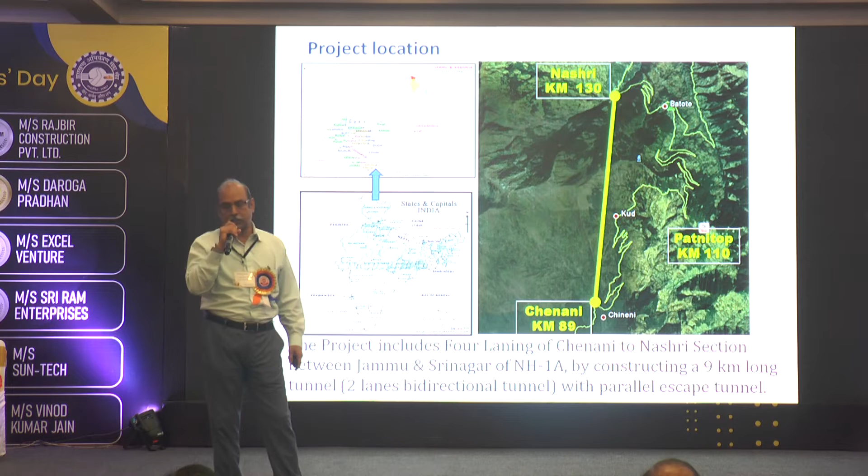It's not working here.

So, project was conceived in 2002. Actually, it was bid in 2009.

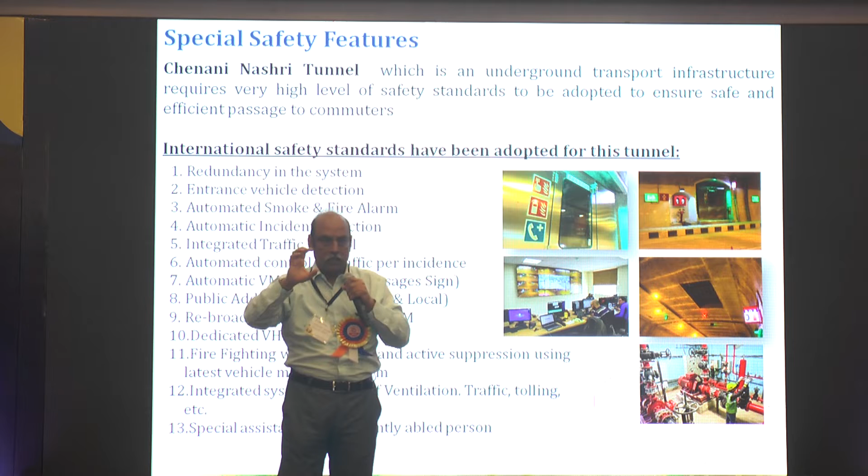लोअर शिवालिक में काम करना, हिमालय में 3 रीजन है - लोअर शिवालिक, पीर पंजाल एंड अबव हिल्स। लोअर शिवालिक मतलब बहुत कच्चे हिल, पीर पंजाल मींस थोड़ा पथरीला हिल, और ऊपर चले जाएंगे तो बहुत अलग चैलेंजेस हैं उसकी जियोलॉजी के। पीर पंजाल में लगभग सैंडस्टोन और बिट ऑफ मेटामॉर्फिक टाइप ऑफ रॉक अवेलेबल है। तो वहां क्लाइमेटिक रिस्क बढ़ जाती है, लेकिन जियोलॉजिकल रिस्क रिड्यूस हो जाती है।

ये टनल लोअर शिवालिक में थी, इसमें जियोलॉजिकल रिस्क बहुत ज्यादा थी। नंबर 2, इस टनल के अंदर ऊपर एक लेक है, सनासर लेक। जो पटनी टॉप जा चुके हैं वो देख चुके होंगे, ऊपर सनासर लेक है। सनासर लेक 6 लाख क्यूसेक की काफी बड़ी लेक है, और वो एग्जैक्टली 350 मीटर अबव इस टनल के है। इस टनल का कवर 1200 मीटर है, मतलब टनल क्राउन से जो हाईएस्ट ओवरबर्डन है वो 1200 मीटर है।

अब आते हैं टनल के टेक्निकल पार्ट पे। 2 टनल हैं, एक मेन टनल, इसके पैरेलल एक एस्केप टनल। इससे पहले हिमालय में इतने कम टाइम में 18 किलोमीटर टनलिंग प्लस एवरी 250 मीटर पे एक क्रॉस पैसेज। ये जो एस्केप टनल है वो मेन टनल से बनाई गई। एस्केप टनल केवल इमरजेंसी के लिए बनाई गई है, मेन टनल ट्रैफिक के लिए है। मेन टनल और एस्केप टनल को कनेक्ट किया गया है सेफ्टी के लिए, एवरी 250 मीटर में। जो मेन टनल है उस पे हर 500 मीटर पे एक लेबाई दी गई है कि अगर एक्सीडेंट हो, लेबाई ऑल्टरनेट है, एक इस तरफ एक उस तरफ। तो जो ऑल्टरनेटिवली लेबाई दी है वो पर्पज है एक्सीडेंटेड व्हीकल पार्क करने का।

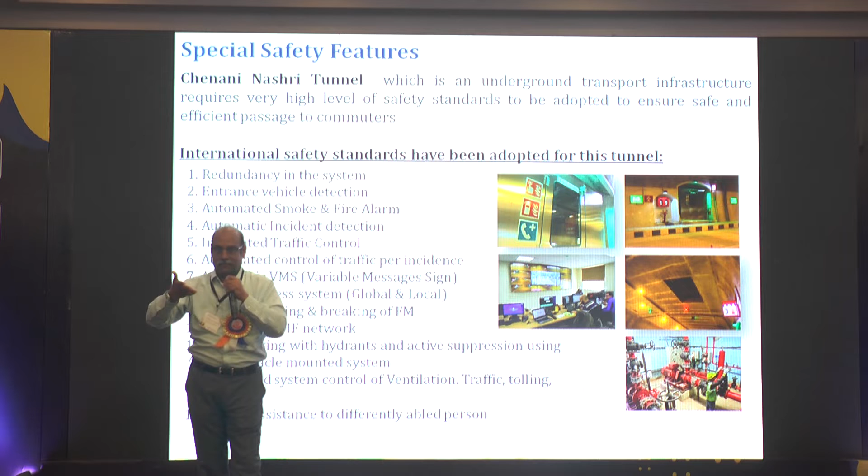इसमें क्या क्या सेफ्टी फीचर हैं जो इसे एक इंटरनेशनल टनल बनाती हैं। सबसे पहला रिडेंडेंसी। फॉर एग्जांपल मैं एक पावर की रिडेंडेंसी की बात करूं, 10 MVA का कनेक्शन है, मतलब इलेक्ट्रिकल इंजीनियर इन्वॉल्व हो रहा है। मैं सिविल इंजीनियर हूं, मैं जियोटेक्निकल की बात कर चुका हूं, जियोलॉजिकल की बात कर चुका हूं, अब मैं बात कर रहा हूं इलेक्ट्रिकल की। 10 MVA के कनेक्शन हैं दो।

दस MVA के दो कनेक्शन हैं, दो इंडिपेंडेंट - एक बटोट ग्रिड सब स्टेशन से और एक दूसरा उधमपुर सब स्टेशन से है। मतलब दो इंडिपेंडेंट पावर सोर्स हैं। इसके अलावा डीजी सेट लगा हुआ है 10 MVA का। इसके बाद में 65 UPSs लगे हुए हैं, वो इसके सिस्टम को टेक ओवर करते हैं।

उसके बाद में अंदर टनल के एवरी 250 मीटर पे यूपीएस लगा हुआ है जो 250 मीटर की लाइट की रिक्वायरमेंट को फुलफिल करता है। मेरा कहने का मतलब यह है इसका रिडेंडेंसी लेवल लगभग 3 है। मतलब कोई भी चीज अगर आप देखेंगे इसके अंदर तो वो 3 टाइम्स है। मतलब एक शटडाउन हुआ, दूसरा शटडाउन हुआ, थर्ड पे स्विच कर जाएगा। दैट इज द रिडेंडेंसी लेवल इन दिस टनल।

कोई भी व्हीकल है, दिस टनल इज डिजाइंड फॉर 30 मेगावाट फायर। 30 मेगावाट फायर के लिए डिजाइन है। मेगावाट फायर का मैं एक बता देता हूं - 30 मेगावाट फायर मतलब अगर एक बस अंदर टनल में जल जाए तो टनल को कुछ नहीं होगा, टनल के किसी सामान को कुछ नहीं होगा, लाइनिंग को कुछ नहीं होगा।

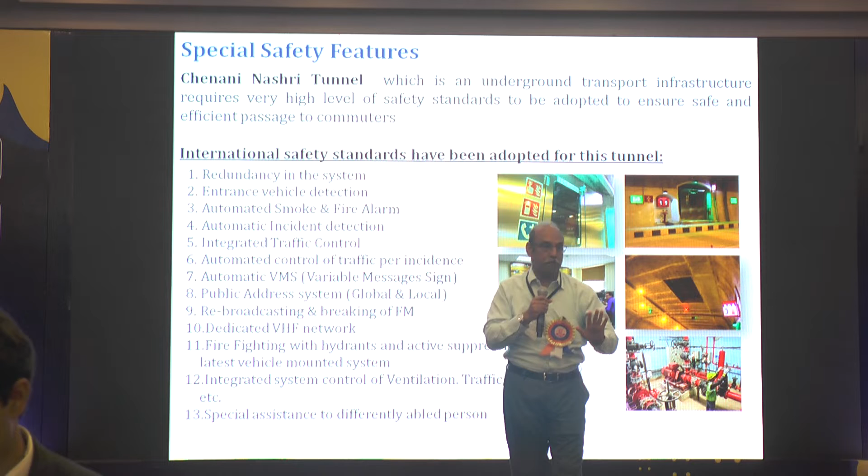ये एवरी इक्विपमेंट IP65 मिनिमम है, IP67 भी है, मींस 1000 डिग्री फॉर 60 मिनट और 250 डिग्री फॉर 2.5 आवर. दैट्स द कॉम्बिनेशन जो इसमें किया गया है सारे इक्विपमेंट का.

तो एंट्रेंस पे अगर आप डिटेक्ट नहीं करोगे, ये है आर्टिफिशियल इंटेलिजेंस, AI. AI मींस ऑल द traffic management system, all control systems is governed by one software, और वो सॉफ्टवेयर ऑटोमेटिकली चलता है. उसमें ऑलरेडी सिनेरियो क्रिएट किए हुए हैं, वी हैव क्रिएटेड ऑलमोस्ट 250 सिनेरियो. अगर ऐसा होगा तो ऐसा होगा. क्रॉस पैसेज नंबर 4 पे अगर कोई व्हीकल खराब होता है तो कैसे डील किया जाएगा, क्रॉस पैसेज नंबर 16 पे अगर कोई आग लगती है तो कैसे डील होगा, अगर हवा नॉर्थ से साउथ चल रही है तो क्या होगा, हवा साउथ से नॉर्थ चल रही है तो क्या होगा. ऑल दिस परम्यूटेशन कॉम्बिनेशन हैज बीन मेड इन द सॉफ्टवेयर.

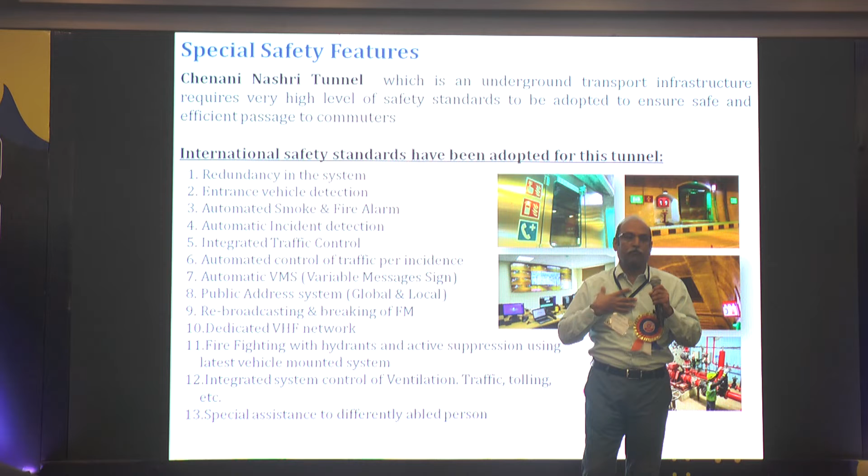वी वर वर्किंग इन J&K, very close to the international boundary, and it was that time terrorism was at peak. During our execution, Burhan Wani case happened, and we know how we controlled the labor. 2,000 आदमी every day टनल में काम करता था, 24/7 टनल का काम चलता था. 1,000 से 1,200 आदमी पहली शिफ्ट में और 800 से 1,000 आदमी सेकंड शिफ्ट में काम करता था, 12 आवर्स की शिफ्ट होती थी.

हर जगह हर तरह का काम चल रहा था. कहीं लाइनिंग चल रही थी, कहीं एक्सकेवेशन चल रहा था, कहीं ब्लास्टिंग चल रही थी, कहीं सपोर्ट सिस्टम लग रहा था, आई मीन एवरीथिंग वाज गोइंग ऑन. एंड ऑल इंजीनियरिंग फेजेस, वेंटिलेशन था, मैकेनिकल इंजीनियर का रोल था, इलेक्ट्रिकल, इतनी लाइन देनी पड़ती थी अंदर. 11 kV की लाइन थ्रू एंड थ्रू 4 बार चल रही थी. इस टनल के अंदर 350 किलोमीटर, 9 किलोमीटर की टनल में इलेक्ट्रिक लाइन डाली हुई है.

तो इमेजिन, फिर इसमें एक इंटीग्रेटेड ट्रैफिक कंट्रोल सिस्टम डाला है, मींस एंट्रेंस किस व्हीकल को करना है. अगर वो एंट्रेंस क्राइटेरिया को फुलफिल नहीं करता, पहला बूम बैरियर डाउन होगा. अगर वो पहले बूम बैरियर को क्रॉस कर गया तो सेकंड बैरियर डाउन होगा और उस व्हीकल को अंदर नहीं जाने देगा. बाय दैट टाइम आवर टीम विल बी एक्टेड, क्योंकि मैसेज चले जाएंगे सबको ऑटोमेटिकली SMS और कॉल ऑटो सॉफ्टवेयर से, और वो इमीडिएटली उस व्हीकल को वहां स्टॉप कर देंगे. That's the kind of traffic control system that has been placed.

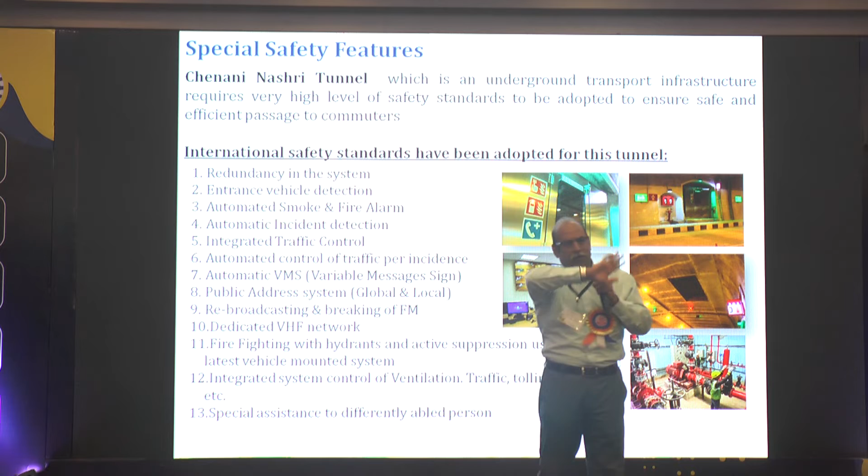All variable sign message, lane control system, lane messages सब immediately activate हो जाएंगे और वो सारे connected होंगे सॉफ्टवेयर से. और वहां सॉफ्टवेयर कंट्रोल सेंटर में केवल 3 आदमी बैठते हैं, एक PA सिस्टम पे वर्क करता है. वील टॉक अबाउट दैट, ऑटोमेटेड कंट्रोल ट्रैफिक पर इंसिडेंट पर, फिर उसके बाद अगर कोई इमरजेंसी हुई टनल में और टनल को रोकना है ट्रैफिक को।

तो जो पहले एंट्रेंस है विच इज अबाउट 600 मीटर बिफोर, वहां पहला बूम डाउन होगा. देन टोल प्लाजा है अबाउट 250 मीटर, वहां सारे बूम डाउन हो जाएंगे. देन टनल एंट्रेंस पे बूम है, वो भी डाउन हो जाएंगे.

किस साइड के डाउन होंगे? जो एंट्री साइड है, एग्जिट साइड कंटिन्यू रहेगा ट्रैफिक, जिससे अंदर जितना भी है वो चला जाए. अब जो इमरजेंसी हुई है उसके हिसाब से वेरिएबल साइन मैसेज लगे हुए हैं. लगभग 350 वेरिएबल साइन मैसेज है टोटल. जो जो इमरजेंसी है, जिस जिस तरह की इमरजेंसी है उस हिसाब से बता देंगे.

फॉर एग्जांपल अगर ये इमरजेंसी है कि टनल के अंदर जो ट्रैफिक है उनको व्हीकल अंदर छोड़ना है और इमीडिएटली क्रॉस पैसेज की तरफ भागना है, तो वो उस हिसाब से मैसेज बता देंगे.

ठीक इसी तरह इसके अंदर पब्लिक एड्रेसिंग सिस्टम को कैसे सिंक्रोनाइज किया हुआ है, ये देखिए. पहले पब्लिक एड्रेसिंग सिस्टम से बोलते हैं कि आप अपना व्हीकल छोड़ दीजिए और बाहर चले जाइए, लेकिन माइक बोल रहा है और मैं जा रहा हूं BMW में या मर्सिडीज में, मेरे कांच एकदम बंद हैं, AC चल रहा है, मुझे तो सुनाई ही नहीं देगा बाहर क्या हो रहा है. तो क्या करूं, कैसे उनको कम्युनिकेट करूं जो अंदर बैठे हैं कि भाई रुक जाओ?

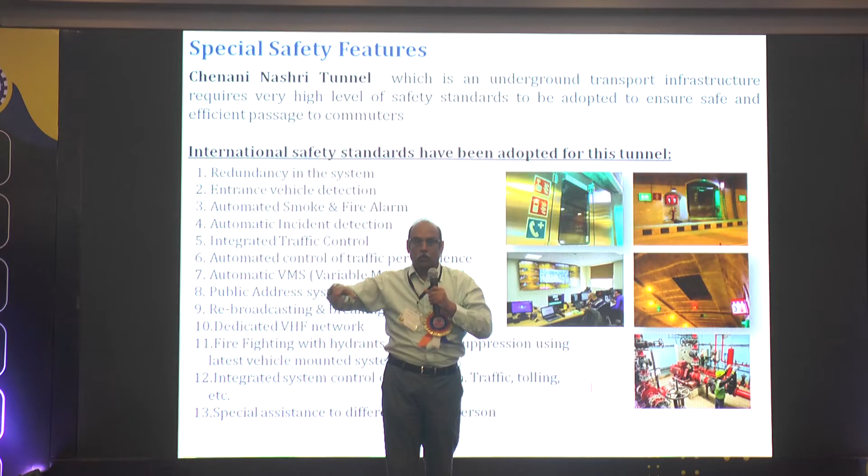जब वो एफएम चला के अंदर घुसते हैं तो आप एफएम को ब्रेक करो और बोलो भाई तू अपनी गाड़ी से रुक जा, यहीं उतर जा और भाग क्रॉस पैसेज की तरफ. तेरे पास नियरेस्ट क्रॉस पैसेज जो भी है उसमें चला जा अंदर.

क्रॉस पैसेज प्रेशराइज्ड है. प्रेशराइज्ड मतलब उनमें से हवा, दरवाजा खोलोगे तो बाहर आएगी, अंदर नहीं जा सकती. प्रेशराइजेशन करते हैं ना, जैसे आपने मॉल में देखा होगा, एक फैन लगा होता है, जैसे ही मॉल का दरवाजा खुलता है और आप एंट्री करने वाले होते हो, आपकी तरफ हवा आती है. ऐसे ही प्रेशराइजेशन किया हुआ है एस्केप टनल को और क्रॉस पैसेज को. तो अंदर धुआं नहीं जा सकता, अंदर आग नहीं जा सकती, बाहर हवा आने की वजह से. ये नेक्स्ट लेवल ऑफ सेफ्टी है.

अब अगर एफएम भी उसने बंद कर दिया तब क्या करोगे? पहला लेवल, जो स्पीकर लगे हुए हैं एवरी 25 मीटर पे, उन पे अनाउंस कर दिया. दूसरा लेवल, उसको वेरिएबल साइन मैसेज दे दिया. तीसरा लेवल, आपने एफएम दे दिया.

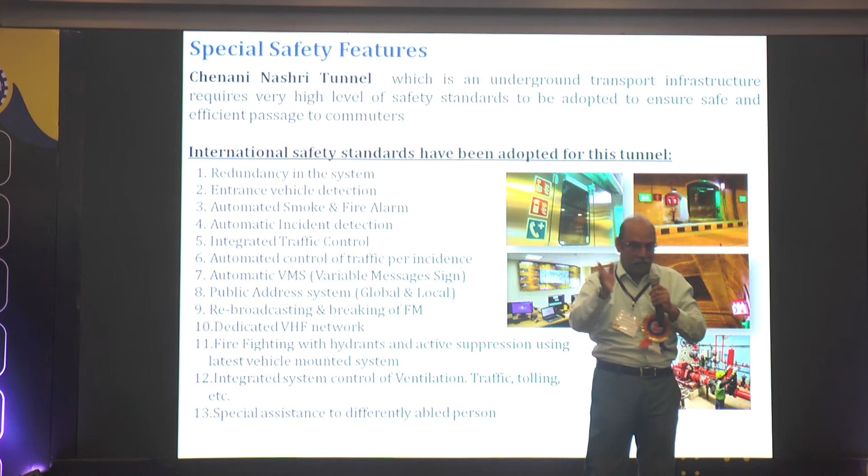अब चौथा लेवल, हम जितने मोबाइल अंदर टनल में जा रहे हैं, उन सब मोबाइल को हम रूट कर रहे हैं हमारे कंट्रोल सेंटर से. मतलब अगर मैं बटन दबाऊं तो सारे मोबाइल में बेल बजेगी और रिकॉर्डेड मैसेज आ जाएगा, अरे भाई निकल यार, तेरा गाड़ी रोक, इधर इमरजेंसी हुएला है, बाहर निकल.

दिस लेवल ऑफ इंटेलिजेंस वी हैव इनपुट और इट इज ऑटोमेटिक, आई एम नॉट डूइंग एनीथिंग. बाय द वे, गवर्नमेंट ऑफ इंडिया में किसी ने कंप्लेन किया कि मेरी प्राइवेसी जा रही है, हो सकता है इनका ऑपरेटर मेरी आवाज सुन रहा है, मैं किसी से पर्सनल बात कर रहा हूं और ये सुने, तो आप इसको स्टॉप करो.

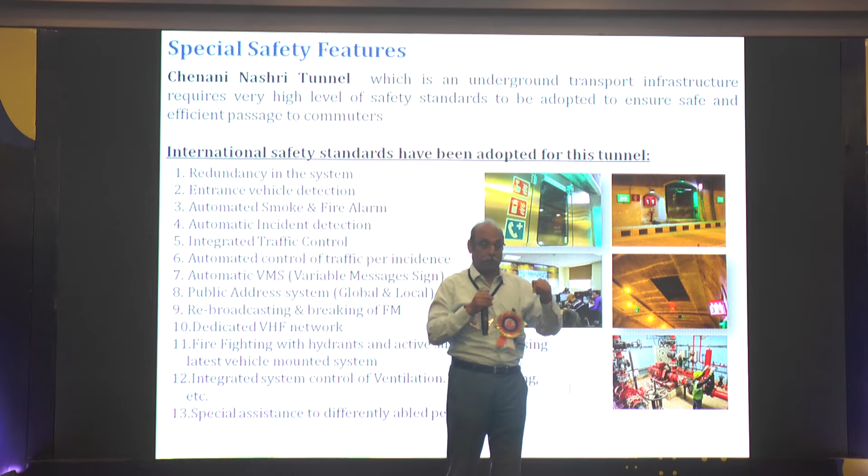और टोटल टीम, जो वहां पे पूरी टीम है, उन सबको वॉकी टॉकी दिया हुआ है. वो वॉकी टॉकी पे हम अपना डेडिकेटेड फ्रीक्वेंसी चैनल रन करते हैं. अब आप आइए वेंटिलेशन सिस्टम पे.

अगर अंदर टनल में, नेक्स्ट साइड, ये तो हुए सेफ्टी फीचर. अभी एक सेफ्टी फीचर और है, दैट इज वेंटिलेशन सिस्टम. इस टनल में वेंटिलेशन सिस्टम है, फुली ट्रांसवर्स वेंटिलेशन सिस्टम.

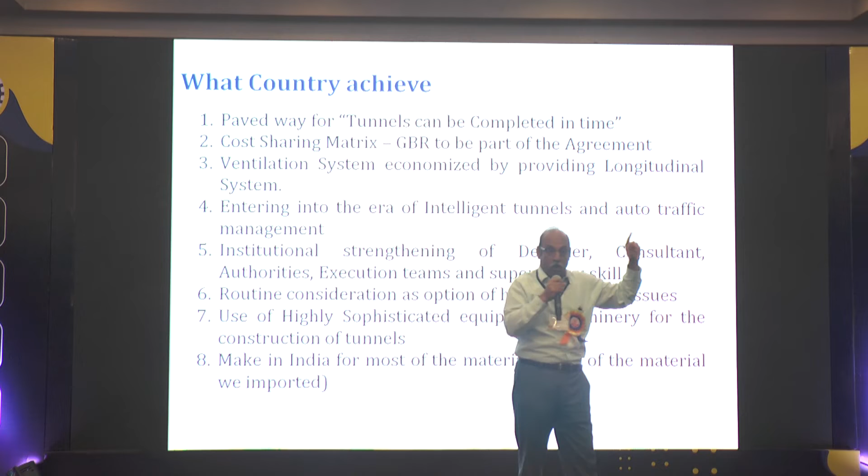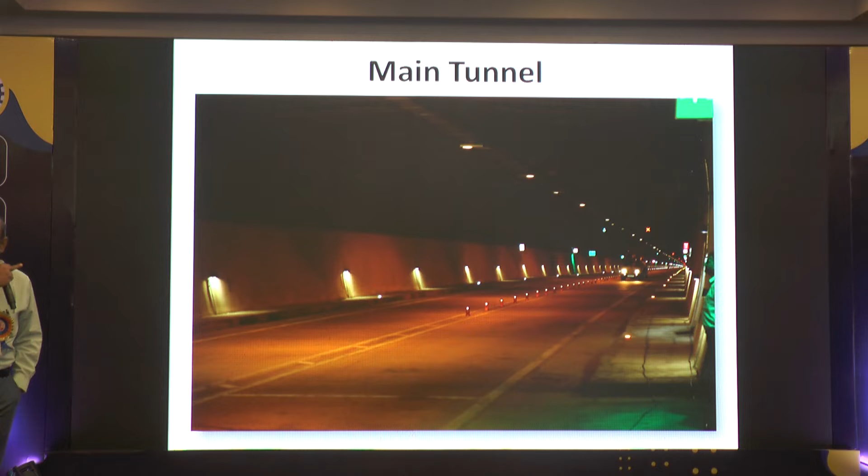Next, there is the toll plaza, both sides this toll plaza is there. Next, there is the main tunnel. Next, I think this is the last. Please, this is the final photograph of the tunnel. Today it looks like this. Whatever photograph you are seeing is the tunnel photograph. That's all. I tried to cover as much as possible, whatever I can. Thank you very much.

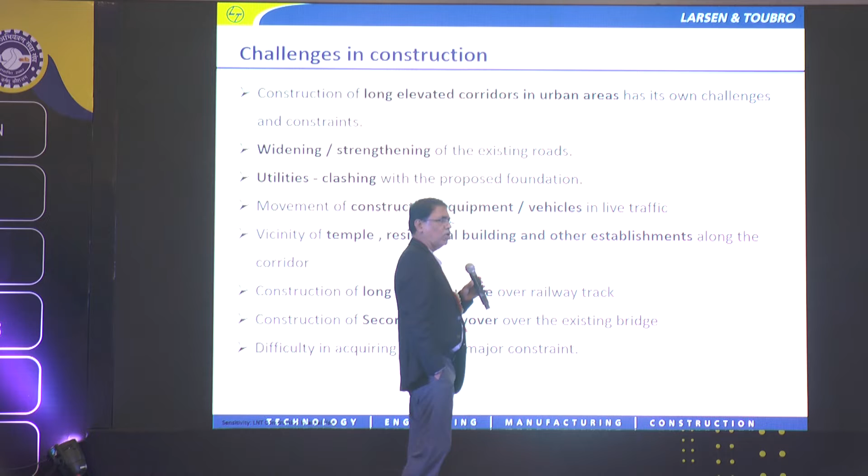The challenge in this particular stretch is basically that it is difficult to do the widening of any of the urban roads, because all the establishments are already there and it is difficult to demolish or acquire additional land.

Second is the utilities. Because of large utilities which are underground below the existing road, it becomes difficult to do the construction. Now, unless those utilities are diverted, there's a delay in constructing or completing the project. So that thing has to be taken care of.

Another thing is that there are a lot of temples, residential buildings along the corridor. That also makes the construction very difficult. Third is there is a railway track. Now, according to the railway requirement, one cannot do any foundation within the railway boundaries. So that is another challenge, to construct a long span structure across the railway track.

Third thing is the alignment goes over the existing bridge. So to overcome that existing bridge, what should be the structure which can be provided and can be constructed? It should also be constructible. So it is a second level flyover over the existing bridge. And finally, as I said in the beginning, the difficulty is the ROW. The space is not sufficient to do any type of construction.

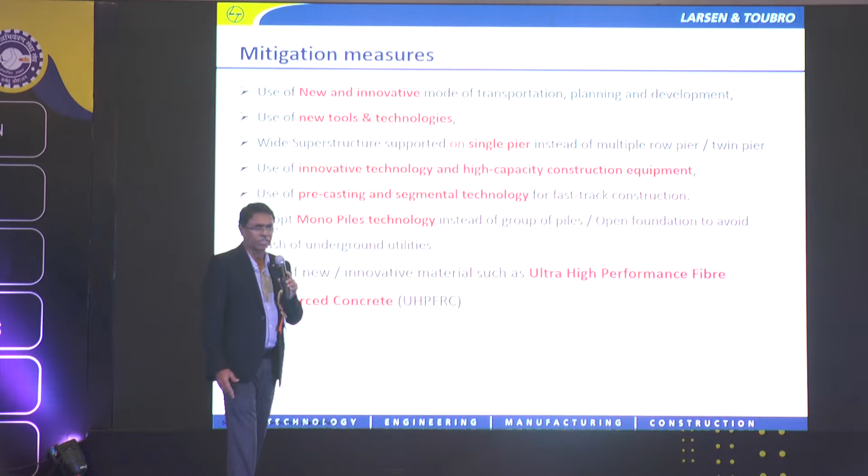Now, how to overcome these types of challenges? One thing is that you have to adopt new technology. I think in the first session, Prashant sir said there has to be some new technology to be developed. Some new materials, sustainable materials, have to be brought into place to do the construction. Then, as I said, new tools and equipment, heavy machinery, have to be brought in place, and also new innovative technologies have to be brought to complete this construction.

Then what we are doing is further you require precasting. Now most of the projects, as you see, are all fast track projects. In such fast track projects, it is impossible for you to do cast in situ construction at most of the locations, because cast in situ takes that much time for you to complete the casting with concrete.

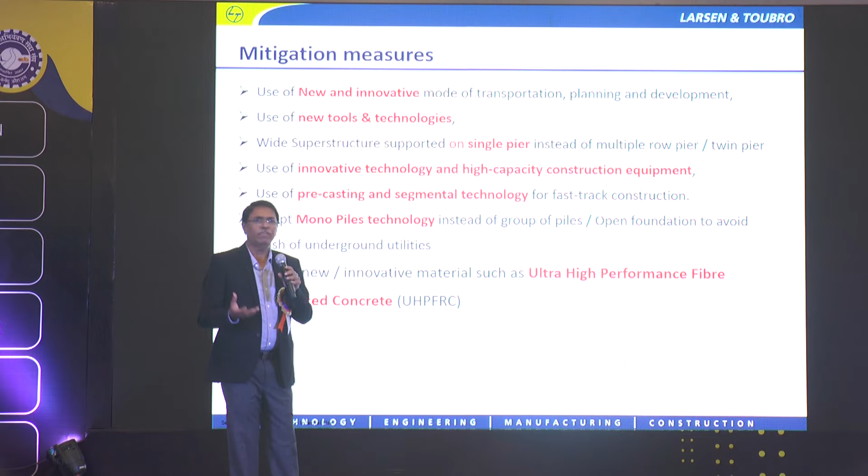It will require curing time, and then in case you are going for pre-stressing, you have to wait for those many days and do the pre-stressing. So cycle time is there. So if you simultaneously do casting in the yard, bring the structure to location and start the construction, it becomes faster. So for all these fast track projects, we have to go for precasting.

Another issue is what we are looking at: we would be adopting a monopile arrangement. Monopile is a new technology which has come to India. There are a few structures which have already been constructed by L&T, but finally we are looking at constructing monopiles in this particular project.

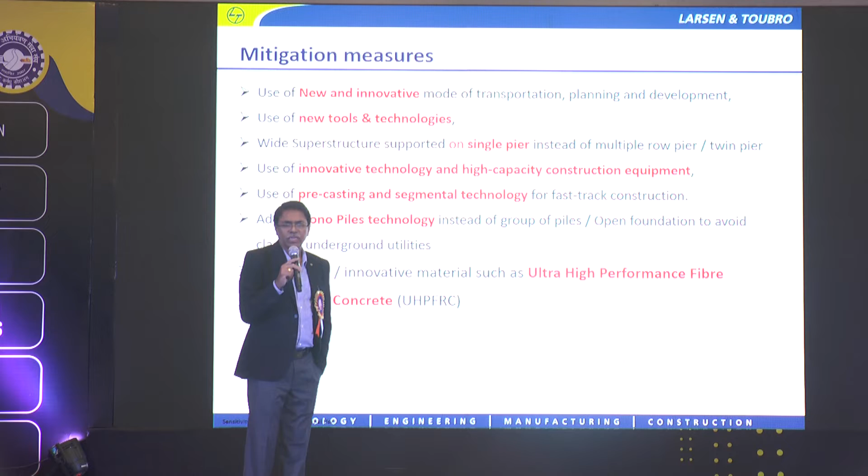So this is the alignment of the Ranchi corridor. The elevated corridor to be developed is almost 4 lane, 2+2 lane throughout, and 1 lane which goes towards Patel Chowk. It is a 2-lane ramp. Next. So this is the basic alignment, or the span arrangement which is given along the corridor.

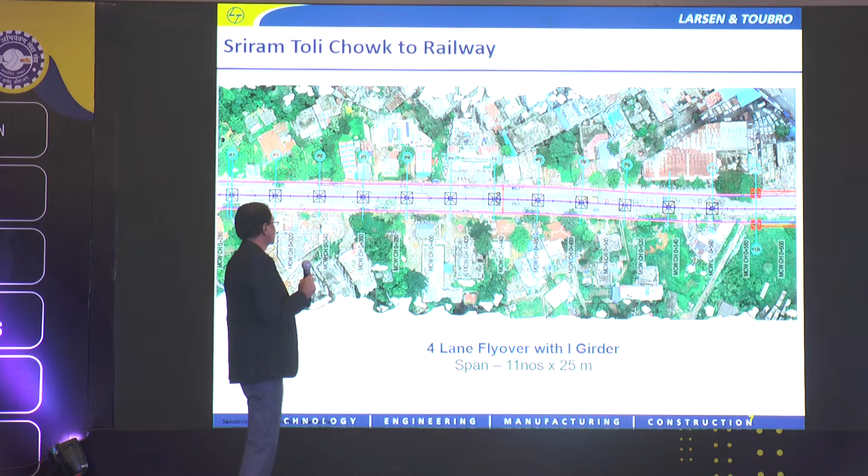So this alignment then crosses over the Nala and reaches Rajendra Chowk. And from Rajendra Chowk it goes to MECON roundabout. And one arm goes to Nepal House from Rajendra Chowk.

So now if you see the utility corridors, so many utilities are there. There are almost 4 to 5 utilities which are underground and coming exactly at the foundation location. If you go for any type of foundation, say open foundation or pile foundations, the number of piles required will also be more. So that means we have to first divert the utilities, and only then will you be able to do the foundation work.

So what we are thinking of is bringing a new technology, which is monopile construction, which will avoid any shifting of the utilities. So if you see the open foundation versus the monopile foundation, the monopile will be just a single pile of a larger diameter.

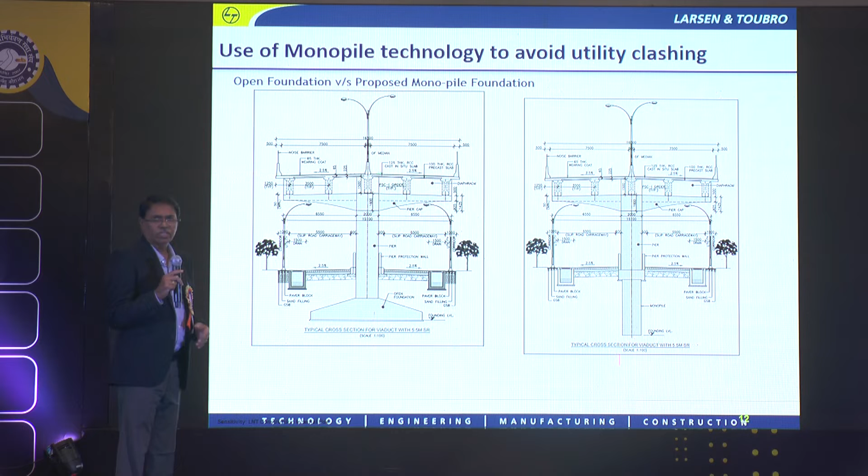Then the entire structure can be constructed over the monopile. Next, I'll just brief you what exactly is the monopile.

It is just a single, large diameter pile, and the diameter may vary from 2 meter to 2.5 meter, 3 meter. It can go up to 6 meter also. Even 6 meter monopiles have been constructed, but not in India. In India, the maximum monopile constructed is 3.5 meter diameter.

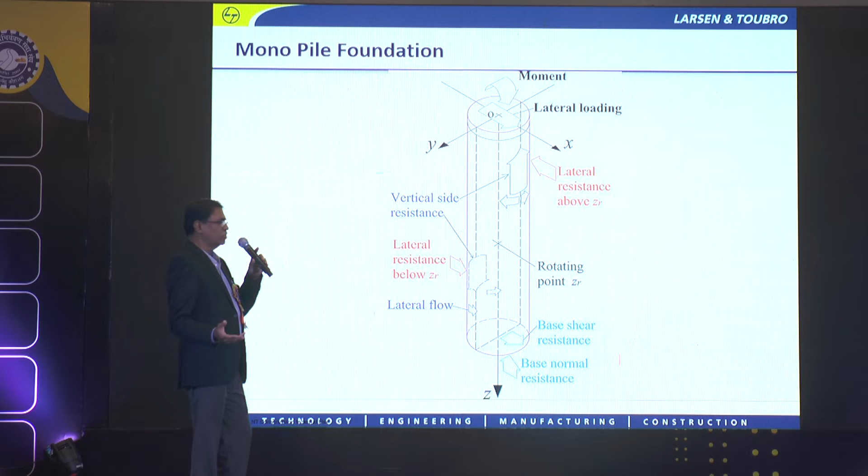Generally, these monopiles are constructed in marine environments, where it is difficult for turbine towers also, because those towers which are there in the marine or in the sea, these monopiles are constructed there. Nowadays, it is also considered to be adopted in elevated corridors where congestion is there.

If you look into the design aspect of this monopile, the forces acting on the monopile structure are all the forces coming from the pier. That means the vertical load, horizontal forces, and the moment generated from the pier, and how the forces are transferred onto the pile, and how the pile takes the forces. These are the design aspects when looking into the design of the monopile.

I think you can see into this. It will be similar to how you do the well foundation, but wells are of a much larger diameter. Here this pile is restricted to not more than 2 meter or 2.5 meter or 3 meter.

Because depending on the type of strata encountered, the load coming on the pile foundation, based on that, the diameter is decided and the depth is decided. At this particular stretch, probably the depth may not be large. It may extend up to a maximum of 10 to 12 meter, not more than that, depending on the rock strata available.

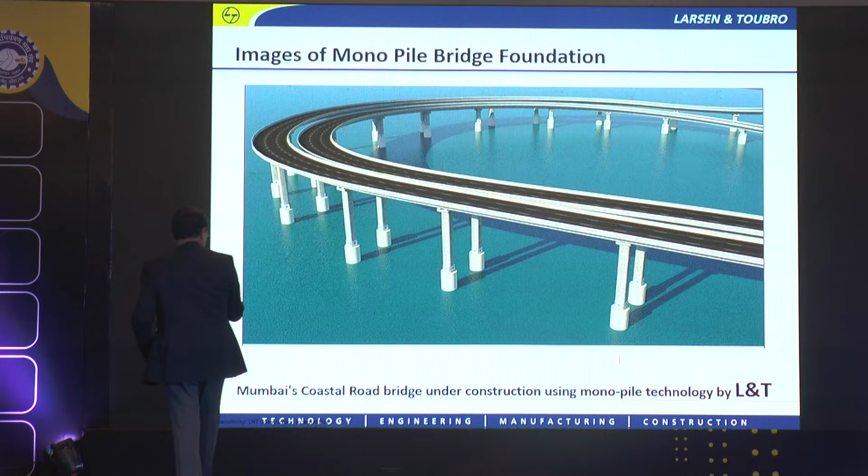Even monopiles, for that matter, we are constructing a monopile in Mumbai for the coastal road project. So for the first time here in Mumbai, we will be constructing this monopile for this coastal road project.

And as I said, a 6-meter diameter monopile has been constructed for a high-speed rail by Japan, and that too in Japan. This is a monopile construction, and some pictures are there of a monopile which is on land, adopted for high-speed rail in Japan. The depth of this 6-meter diameter monopile is almost 20 meter.

Second challenge is, as I said, across the railway span. Now here, if you see the alignment, it is a skew alignment. It crosses the railway; the railway is crossing skew to the alignment. Now this challenge will be, we cannot do any foundation within the railway boundary. We have to locate the piers outside the railway boundary.

Now if that span works out to nearly 132 meter span, how do we construct this single 132 meter span? So for that particular stretch, it is decided to go for an extradosed cable-stayed bridge.

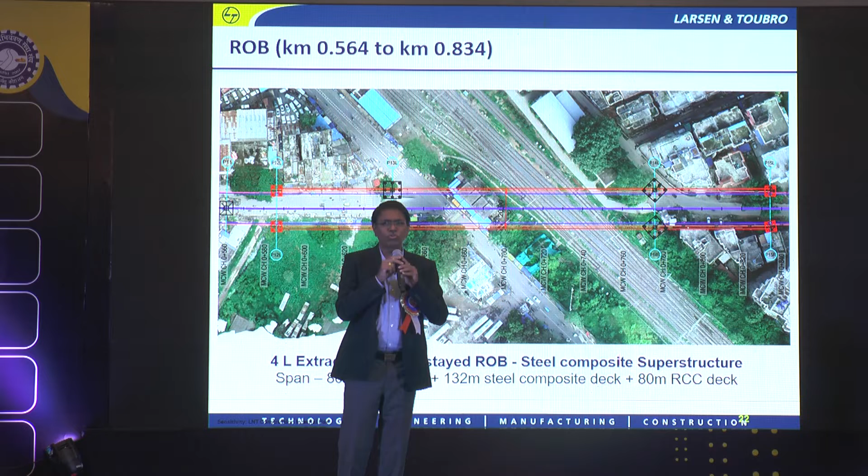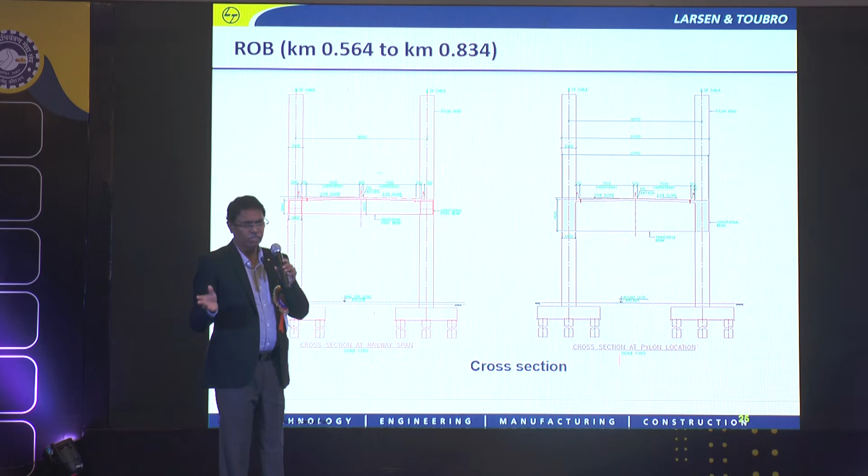Now, because of the ROW constraint, we cannot have a single pylon. We have to go for two pylons, two rows of cables. Now, to construct these two rows of cables on the Patel Chowk side and also on the other side of the railway track, there are few difficulties, because on Patel Chowk side there is a temple, there is a hotel, and so many other structures are there.

So to avoid that and to construct the pylon, we cannot compromise on the width of the deck, because it is a railway requirement. We have to maintain that width. So to maintain that width and construct the pylon, it was a challenge.

Thus, the arrangement given and approved by railway was entirely different. So we had to change the arrangement of the superstructure to ensure that it is feasible to construct and also easy to design. So this is the arrangement we have done.

We made a portal type system, and the backspans will be constructed by precast concrete on staging, and the railway spans will be balanced cantilever construction, and that too in structural steel, because it is a railway requirement. We cannot go for precast concrete in the railway portion, so we will be adopting structural steel.

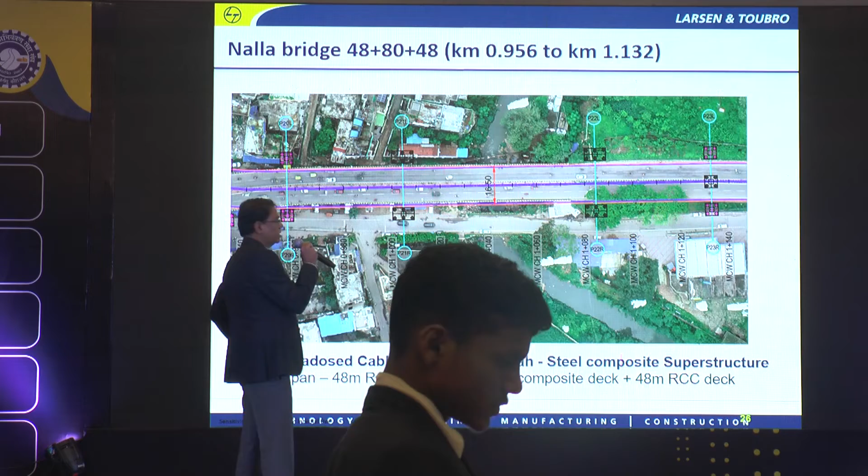Similarly, across that nala where we are crossing, the alignment will be going over the existing flyover. If you see the span here, it is difficult to have a pylon or the pier exactly at the center of the nala, so we have to increase the span.

The span here also works out to almost 80 meter. For an 80 meter span, a single type of structure is difficult to erect. So similar arrangement is considered as what we have for the ROB across the railway. Instead of 132 meter span, it will be 80 meter span, and the back spans will be 48 meter, 48 meter, similar to the existing nala structure.

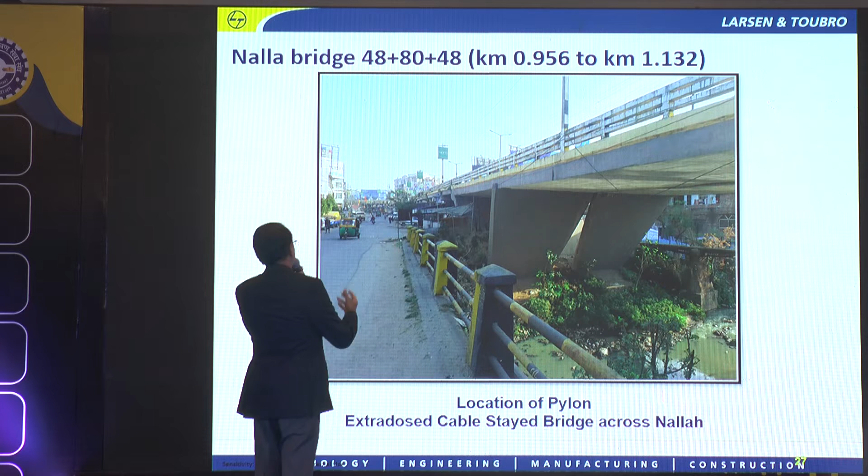The other difficulty here was to carry any construction equipment or precast elements over the existing flyover, because there was a challenge that this flyover may not be able to take the heavy load of construction equipment, or even a trailer carrying a precast segment. So it becomes difficult to take anything, which is why we had to go for cantilever construction over the Nala bridge, with similar arrangement of precasting and erecting the precast segments by cranes on the backspans.

Now what is an extradosed cable stayed bridge? Basically, the extradosed cable stayed bridge is nothing but something in between a box girder or cantilever bridge and a cable stay bridge. Why is it called extradosed? Extrados means it is external. Generally in balanced cantilever construction bridges, our prestress cables are inside the box, whereas those prestress cables are coming outside the box in the extradosed bridge. So those cables also support the deck as well as give some pre-stress in the deck. That is why they are called extradosed bridge.

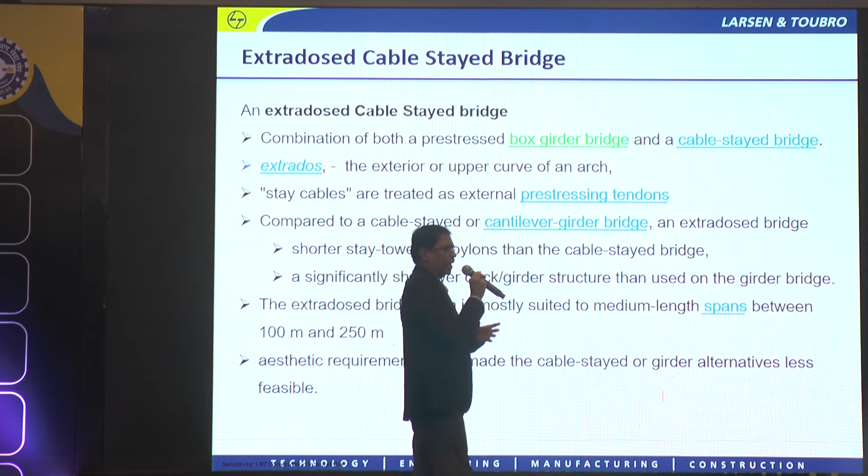Generally the extradosed bridge span arrangement is restricted. You cannot go for a longer span. Maybe up to 200-250 meter extradosed bridges have been constructed, whereas for cable stay bridges, we can go up to 1 kilometer long.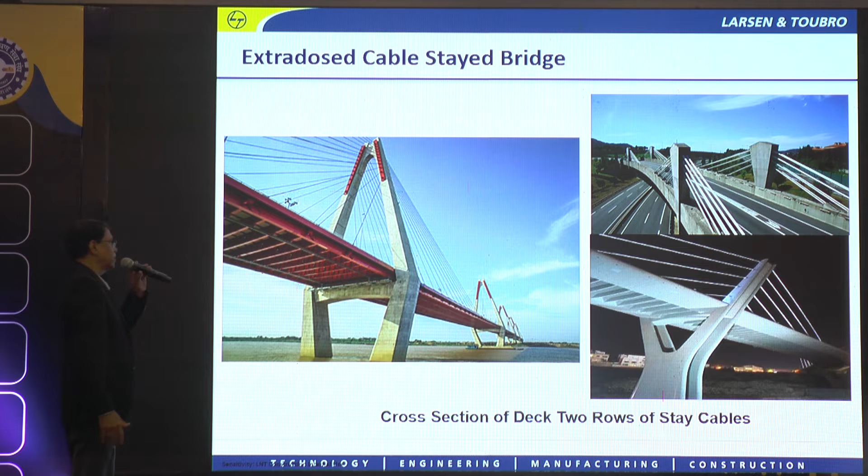For a cable stay bridge, you can go for a normal box type structure with cross diaphragm to hang the entire deck. So the span will be between the two cables for the extradosed bridge, the superstructure supported between the two diaphragms or the two cables. This is the arrangement for a cable stay bridge, either single row of cable or double row of cable, with pylon or box girder arrangement.

Generally for the construction materials, what is used for extradosed cable stay bridges can be steel composite, or pre-stressed concrete or RCC. For the deck, as I said, it can be a girder type system, but boxes are generally adopted for cable stay bridges and extradosed bridges. Towers are restricted, and towers can be concrete as well as steel.

An example of a steel tower constructed in India is the Signature Bridge in Delhi. It is a cable stay bridge where the entire tower is also of steel.

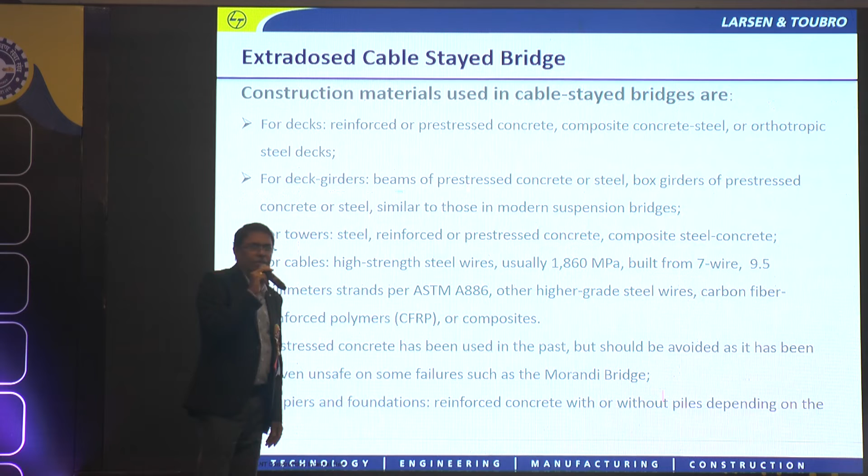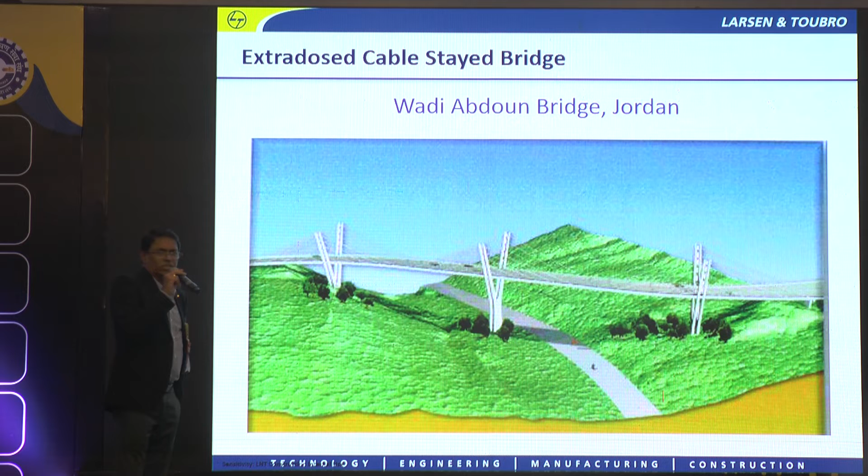Then we go for an innovative material, as I said, sustainable concrete, low carbon. This is a material with low carbon where you do not require any reinforcement. The entire concrete is a high strength concrete where the compressive strength is almost 150 MPa minimum, and it can further increase to 180 or 200 MPa depending on the mix design.

But in this ultra high performance concrete, you use steel fibers, pin-like, very thin fibers. This increases the homogeneity and durability. All those aspects are there for ultra high performance concrete. This is a typical arrangement or mix of the ultra high performance concrete.

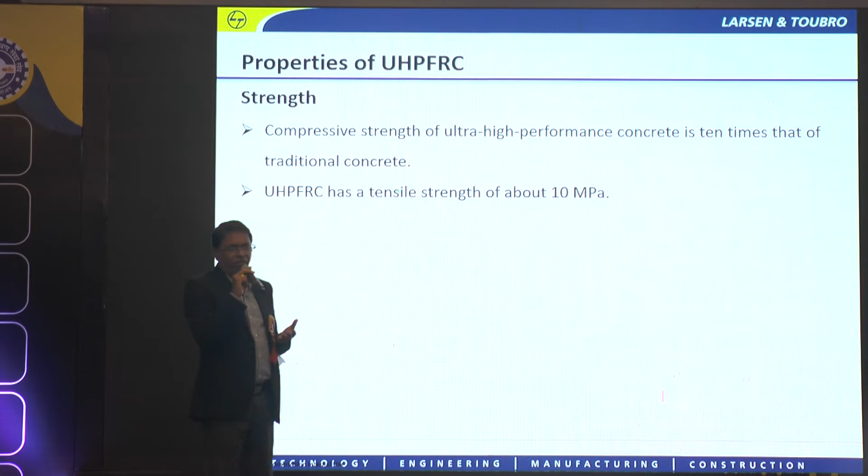Next, it has good strength, including a tensile strength of minimum 10 MPa. Then, as I said, durability - it is similar to a hard rock. It also has a good freezing point, so even in cold countries it can be used, or it can sustain heat. Chloride permeability is also good, and then abrasion resistance is good.

Materials for the mix, as I said, include silica fumes, limestone, fine sand, high range water reducers, water and steel fibers - steel fibers are important. These are the material compositions that can be used, and the placement of concrete as I said. It is used in almost all civil engineering projects, including highways, even highway repairs, prefabrication of girders or bridges, and pile foundations also.

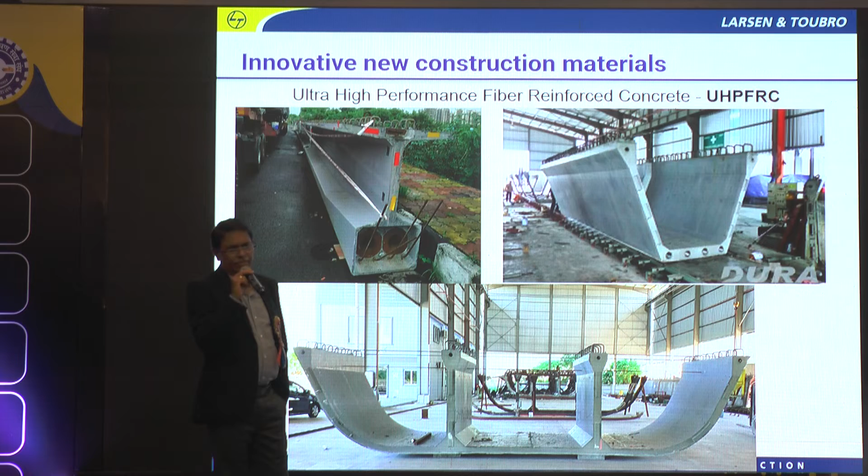These are some pictures of ultra high performance girders already constructed in India. We will see the first bridge of this type constructed in India, which was in Latur, Maharashtra, where Mr. Nitin Gadkari was very happy to use this type of arrangement. And now, since I am in a codal committee, we are bringing out a code for this ultra high performance concrete. Thank you.

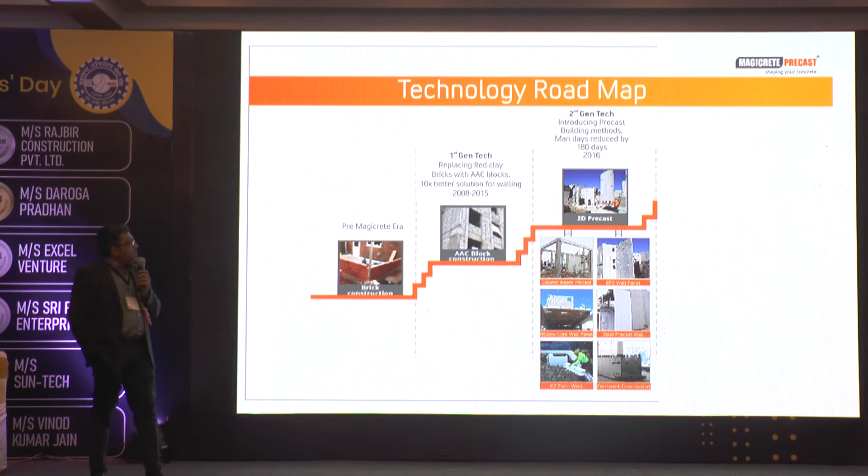During the first session, we had a discussion about technological evolution in the human race. We discussed that the industrial revolution started around 250 years ago. But in building construction, till 2006, 2007, we were using bricks and RCC frame structures. In 2007, CPWD introduced AAC blocks in their SOR as a replacement for bricks. That was the first change in our conventional construction technology, the first generation technology introduced in 2007-8.

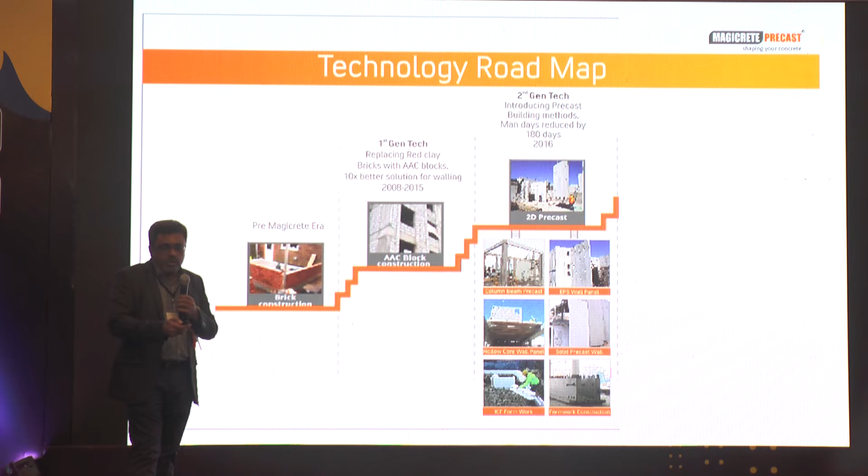After that, around 2015-16 in India, the second generation was officially introduced. That was 2D precast technology. Prefabricated structures were started and mainstreamed in the construction industry. Now in 2018-19, the Ministry of Housing has thought to mainstream the third generation technology. That is 3D modular precast, in which we can do industrialization of the construction process from 70 to 90%.

This is the 3D modular precast. It's Lego-like plug and play modules used in the construction of the building, cast and finished in the factory, and then assembled on site. 90% of the work can be done in the factory. This is basically learning from the automobile industry. You make the spare parts in another factory, bring them to the assembly line, assemble them, and your car is ready. So it is like that.

You prepare the modules or elements in the factory. Simultaneously, you prepare the foundation and bring it up to the plinth level. You keep your plinth ready. Then you bring the modules to the site and start installing them. In this picture, you can see it's a three-dimensional concrete I section. It's 3 meters high, 7 meters wide, one element creating two rooms by its geometry.

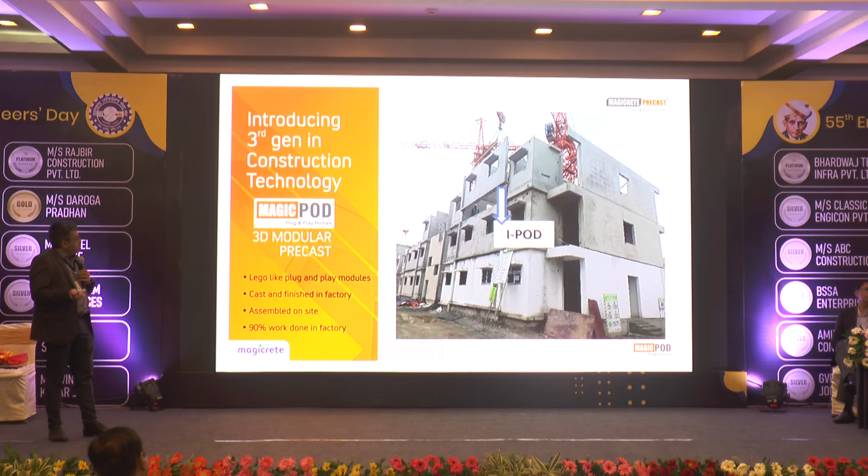This is the classification of industrialized construction. Prefab or offsite construction systems are 3-dimensional and 2-dimensional. 3-dimensional can be precast concrete modules, steel modules, wooden modules, or hybrid modules. In 2-dimensional prefabricated structures, the elements are beams, columns, walls, slabs. It can be steel structures, it can be wooden structures.

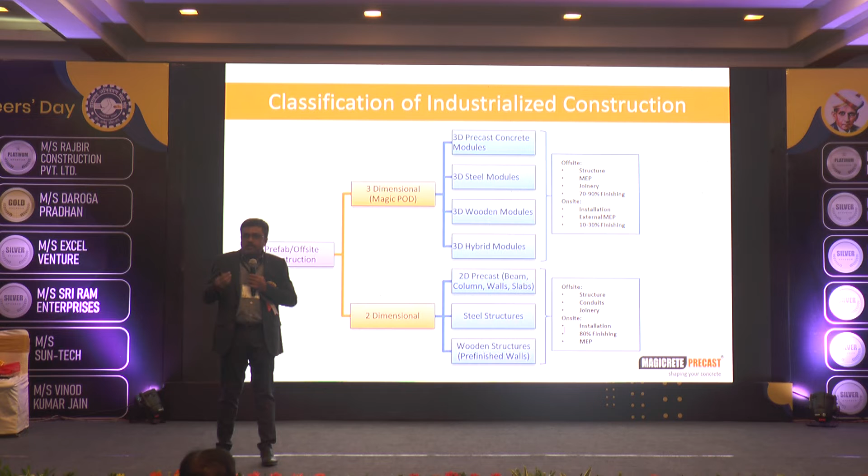In 3D modular, off-site we can prepare the structural elements. MEP can also be done in the factory. Joinery works can also be done. 70 to 90% of finishing can be done in the factory. Simultaneously, on-site, we keep our plinth ready and then bring the elements. You do the installation on-site, external MEP work, external infrastructure work, and the remaining 10 to 30% finishing work, and your project is done.

This is the basic process. In industrialized construction, we break the process of constructing a building into different operations. These are the operations. In one area you do your steel processing. In the production yard, you do module preparation, mold preparation, then the concreting. Once the casting is done, you bring the elements to your finishing yard. You do your MEP work, then joinery work, tiling, painting work, and then you send them to the project site for installation.

The process starts once our floor plans are ready; the first step is modularization of the floor plan. You identify the areas to be modularized. Certain elements can be 3D and 2D, so it can be a combination of 3-dimensional and 2-dimensional elements. It can be 100% 3-dimensional or 100% 2-dimensional.

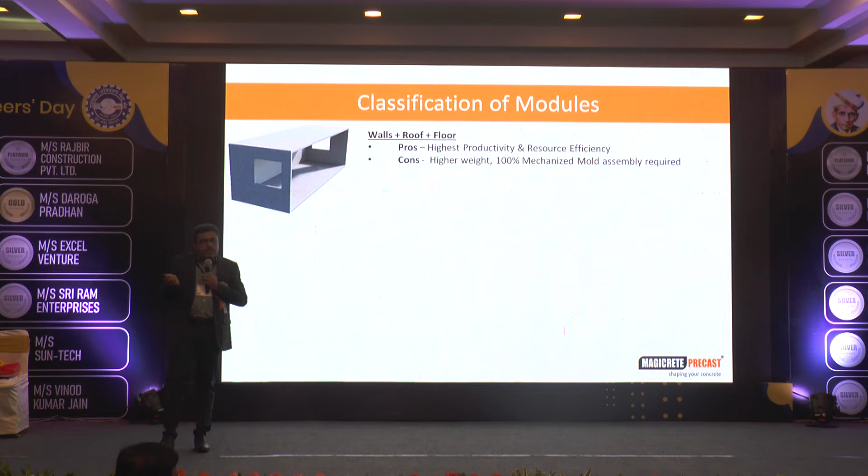So these are the modules, classification of module. Type 1 is where we produce elements with wall, roof and floor, all three parts. The second type is walls and roof, there is no floor. Third one is walls plus floor. So in the lighthouse project here in Ranchi, we are using the third type of module with walls and floors.

This is the production line where we produce the element. We prepare the molds, we insert the processed reinforcement, then we do the casting. So the elements are produced, then we send them to the finishing line where we do the remaining process. We do MEP work, joinery work, tiling work, painting work, and then we send them to site for installation. So this is the logistic part, transportation and then installation on site. So these are the hybrid modules, some of the projects done for the offices.

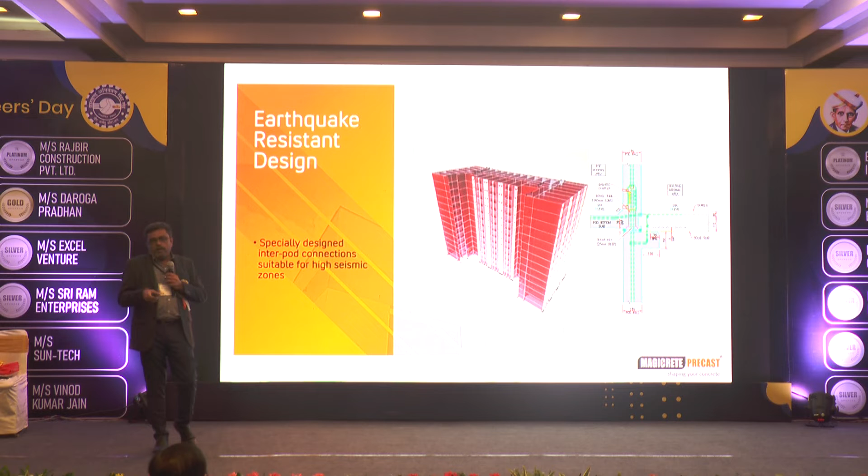In the design part, the main concern usually for the high-rise building or multi-storied building is the seismic resistivity. For precast, the challenge in the multi-story building is the stability of the connections of the elements, because they are separate elements and we join them together. So those connections should be designed in a way that they are suitable for that particular seismic zone. These pod interconnections are suitable up to seismic zone 4.

This is the general comparison between modular precast and conventional construction. Resource efficiency is obviously higher because they are produced in the controlled factory environment, so the material wastage will be less. It is all mechanized process. Time reduction can be done up to 50% based on multiple elements. We can control the timeline by maximizing the number of molds and elements produced per day, and installation on site per day. So we can reduce the timeline up to 50%.

Safety wise, it is always low risk work because it is being done in one place in the confined factory environment. So we can implement all the safety precautions, norms and parameters. Sustainability is always high because the wastages will be less. Then we can play with the type of material. We can use multiple recyclable materials, industrial transformed materials. For example, usually we use sand in producing the concrete.

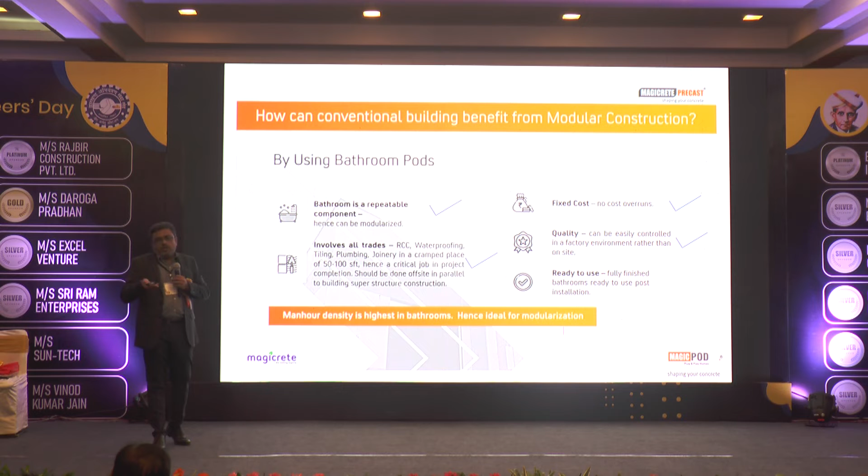So this is the general technology comparison with different alternative technologies other than conventional. For 3D modules, it is not mandatory to go for a 100% prefabricated structure. We can combine the 3D modules with conventional construction. Like the frame is conventional and we use only bathroom pods or kitchen pods made in the factory. These are the types of prefabricated bathroom units.

The first is the normal concrete pod, which we are using for the Ranchi project. Lightweight concrete pods can also be used where the structural frame is steel and we use AAC blocks or lightweight concrete. Then these are drywall PBUs where we use steel structure and drywalls.

This is the installation method: critical path and non-critical path. Critical path is the drop-in method. You lift the element with a crane and drop it on the floor. Another one is the slide-in method, that's a non-critical path.

This is the history of modular building. It started in 1967-1968. The first building was constructed within 202 working days. This is in Montreal, a very famous project for architects, also constructed in 1967. These are some of the new projects. This is the case study. In 2014 it was adopted up to 32 stories, 2018 40 stories, 2019 56 stories. Now the target is to go up to 70 stories.

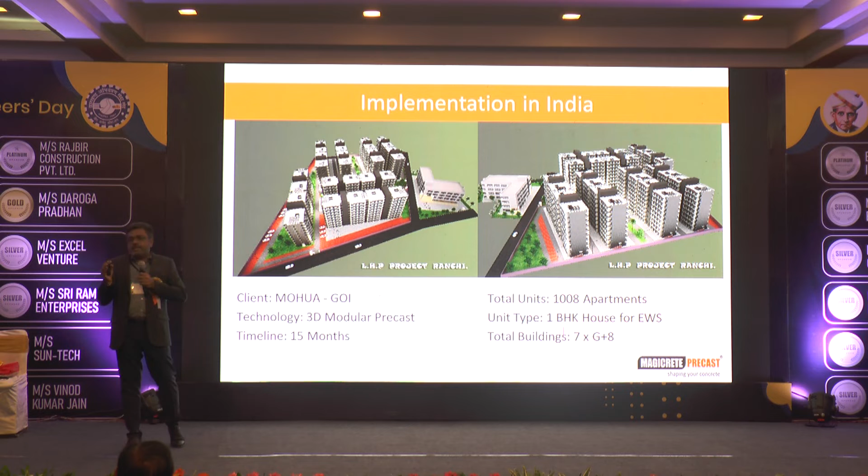This is the project the Ministry of Housing has thought to be implemented in India. It's a lighthouse project being constructed in Ranchi, in Dhurwa. 1008 apartments are being built. It's a 1 BHK house for economically weaker sections. There will be 7 buildings of G plus 8 floors.

These are the actual site photographs. For foundation, we have done a solid raft. Then above the raft, we have made shear walls. Then there is a plinth gable wall, and this is the superstructure.

The main purpose of this project is to involve all the institutes, all the government agencies to mainstream these innovative technologies, and it is our responsibility to be the driver and make the technology Indianized.

Basically, this is a German technology. They use it for bathroom units, kitchen units. Based on our mass housing demand, we need to mainstream this kind of technology. This is the technology being used for the Ranchi project. There are 5 other projects being built with different technologies. So that's all. Thank you.

Kindly be seated there. A thunderous applause for Vitrang Sompura ji for this third generation in construction technology related to buildings construction. जोरदार तालियां इनके लिए. And now we have a very brief presentation by Jharkhand Renewable Energy Development Agency, JREDA, Awareness on Energy Conservation Building Code and Eco Niwas Samhita. Mukund Verma, please come on the stage.

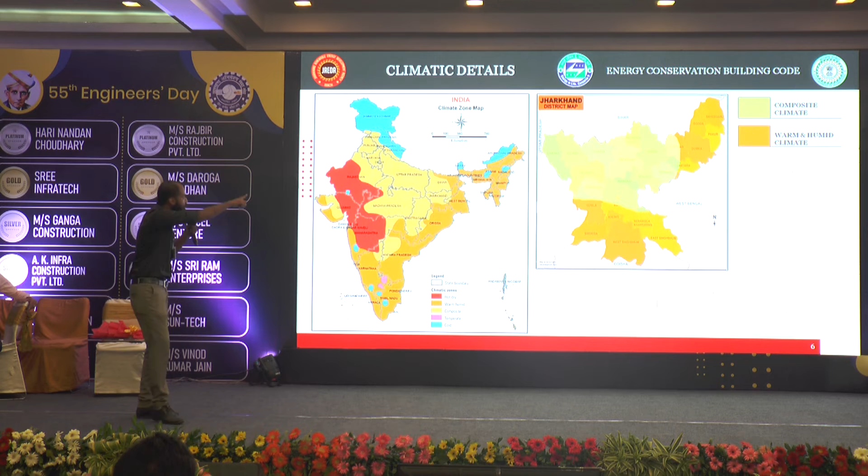Cold, the upper parts and the last parts of northeast. Jharkhand has got two climates. One is composite climate, which is most of the Jharkhand, and warm and humid, which are at the borders. These are the list of cities along with their climate types. As you can see, Ranchi has been highlighted and comes under composite climate.

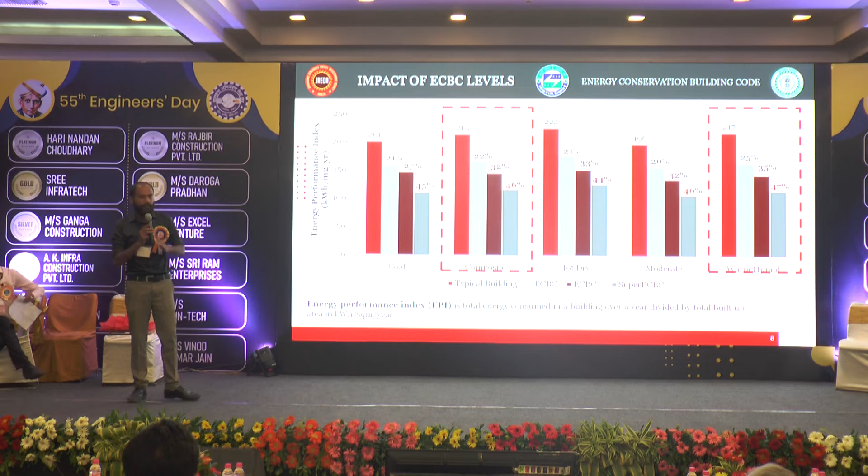These are not steadfast figures, these can change. What I want to show is कि इसके हिसाब से कितना रिडक्शन हो रहा है. If you see, the gray graphs are for ECBC, then the red ones are ECBC plus and dark gray super ECBC. 46 to 47% हम सुपर ECBC में रिड्यूस कर देते हैं.

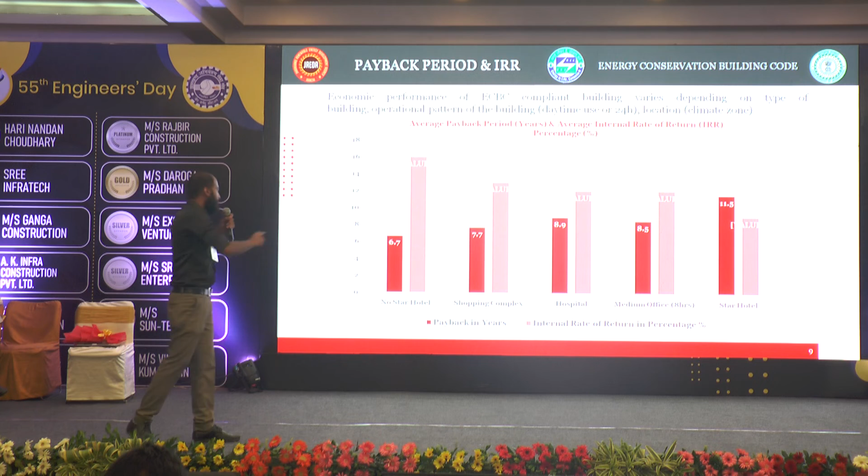This is a chart of average internal rate of return and average payback period. The first charts are average payback periods and the second charts are average internal return. If you see, no star hotels का rate of return ज़्यादा है, इसीलिए उनका payback period बहुत कम है. Same if you go to star hotels, 3 star, 4 star, 5 star hotels, उनका rate of return सबसे कम है, उनका payback time सबसे ज़्यादा है.

These are the 4 components of ECBC, जिनमें ECBC ये बोलता है कि अगर आप इनको कंट्रोल कर लें तो आपका बिल्डिंग कंजम्पशन कम हो जाएगा. फर्स्ट इज बिल्डिंग एनवेलप, which is basically roof and exterior walls of the building. Then comfort systems and controls, which includes HVAC systems, heating, ventilation and air conditioning. Next, lighting and controls.

Next, electrical and renewable energy systems. There are some mandatory requirements which have to be followed in every single case. Then there are prescriptive requirements. That word has been taken from prescription.

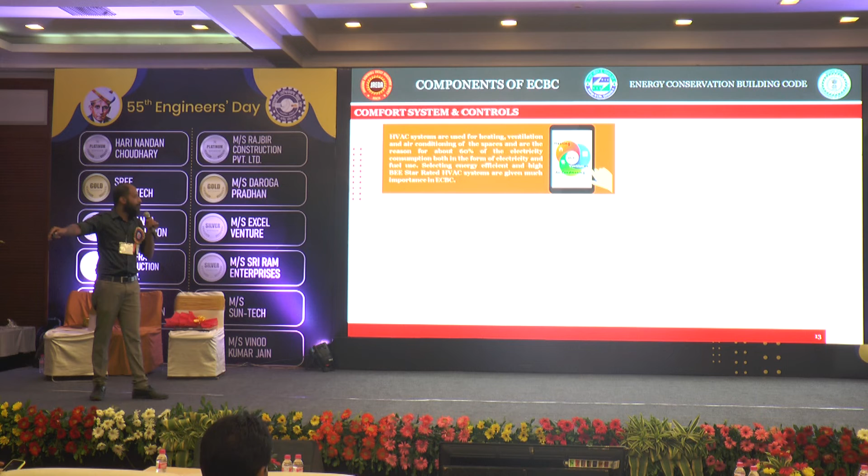Then comfort systems and controls. HVAC. HVAC में again कुछ mandatory requirements हैं जिसमें they talk about chillers, VRFs, air conditioning and condensing units. इनके लिए कुछ सेट वैल्यूज हैं. If you can achieve those, you can achieve ECBC compliance. Next is lighting. Lighting has got some mandatory requirements, some prescriptive requirements.

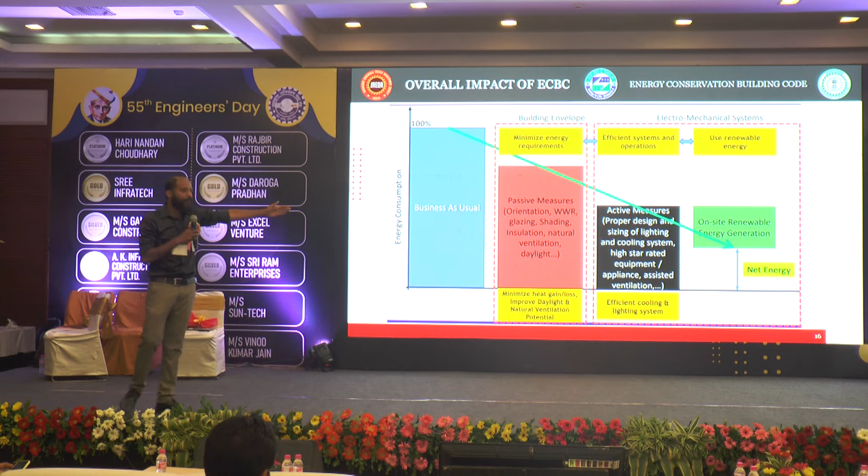This is all. Then there is Eco Niwas Samhita, the residential part of the energy conservation building code. ECBC is for commercial buildings. Eco Niwas Samhita is for residential buildings. Eco Niwas Samhita is in two parts. Part 1 is for building envelope and part 2 is for comfort systems and lightings and its compliance. That's it.